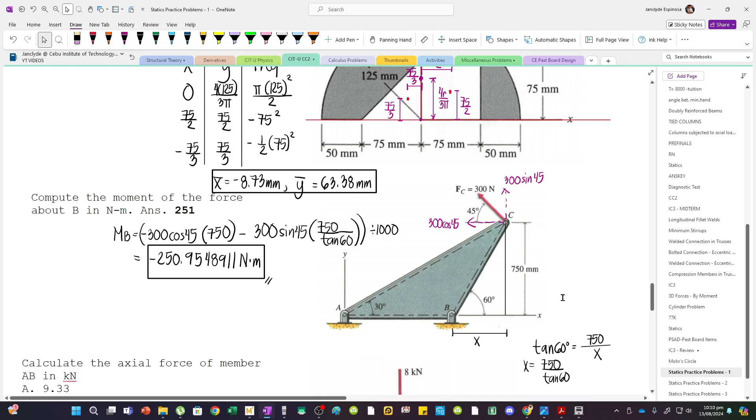Now, yung gusto ko is isang force lang yung gagamitin ko para makuha ko yung moment about B. So, paano yan gawin? We can consider the hypotenuse of this triangle as the perpendicular distance going to point B. Now, if gagawin ko yan, then I must have a perpendicular line sa line BC. So, we have this force. We have this line. This is perpendicular to BC. So, label lang natin. Perpendicular yan. Now, after drawing the perpendicular line, diba, this is 60. So, this must be 30 degrees. Now, if this is 30 and this is perpendicular, then this angle pala magiging 60 degrees.

So, if I am to draw a line that's horizontal, then this is also perpendicular. So, this is also 30. Again, itong drawings mo sa angles, hindi na yan kailangan pag na-master mo na tong method na to. So, essentially, isang force na lang yung kailangan mo, and then, if na-master mo na to, automatic naman yung angles na masosolve mo. So, this is 30. Now, let's draw a line na parallel sa force natin. So, extend daw natin yan. Red na lang din.

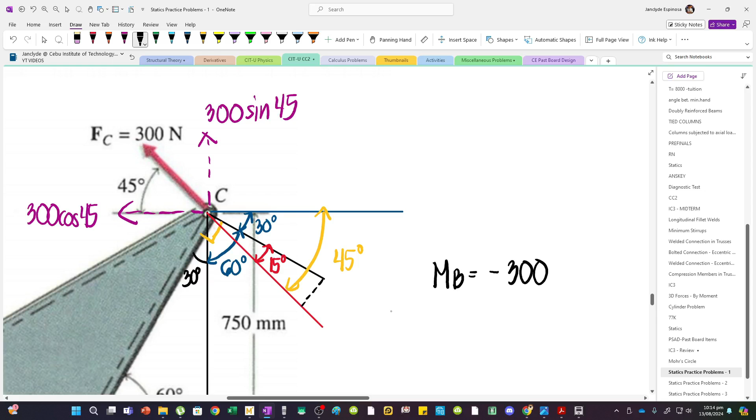So, mangyayari sa solution ko is yung moment about B will become minus 300 sine 45, kasi this will cause still a counterclockwise rotation. Hindi na sine 45 pala, sorry. Ito na. Diba, ito yung force ko, 300 newtons. I will take the component along this line. So, 300, multiply ko by cosine 15. Para makuha ko yung component niya dito. Kasi parang makaka-form na tayo ng triangle dito. So, minus 300 cosine 15, and then multiply ko na lang by this distance. So, diba, that's the hypotenuse of the triangle.

So, we can use the sine relationship. So, sine 60 na lang. Sine 60 equals opposite over hypotenuse. So, opposite is 750. Hypotenuse is unknown. So, H equals 750 over sine 60 pala. So, yan yung moment arm ko. So, 750 divided by sine 60. So, your solution can be converted into this pag alam mo yung components. Now, by the way, divide this by 1,000 para maging Newton meter.

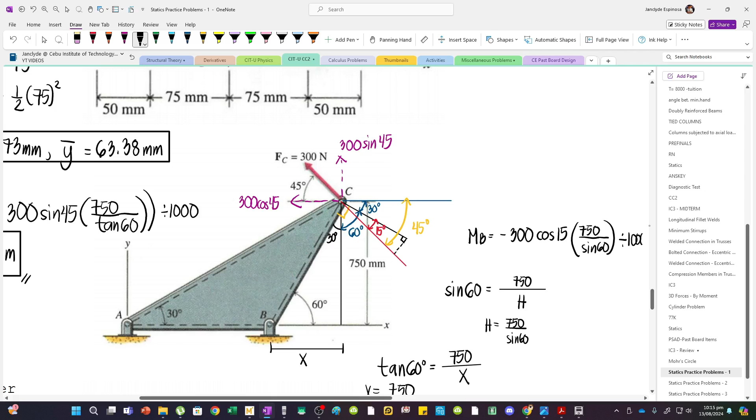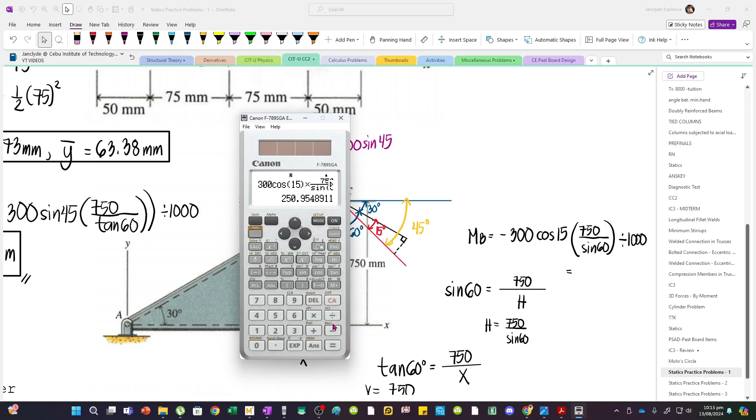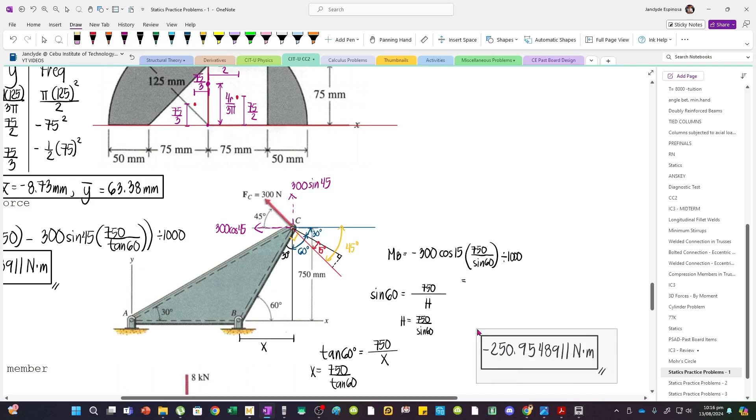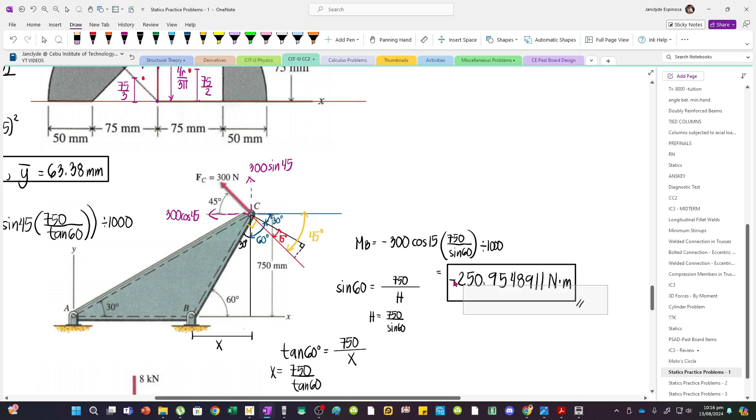So, try natin. Instead of inputting dalawang forces and dalawang moment arms, we have 300 cos 15 times 750 over sine 60. Divide natin by 1,000. So, the same lang din yung sagot natin. 250.95489. By the way, nakalimutan ko yung negative. So, pwede ko lang yan i-copy. So, this may seem intimidating at first, pero pag na-master mo na yung angles, mas madali to. Kasi isang force na lang.